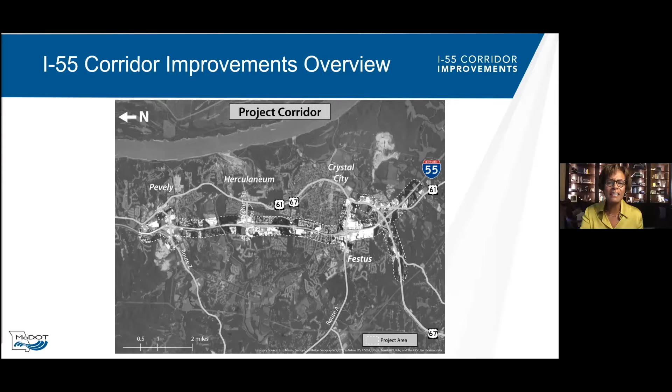No worries. Just to kind of kick off, give you a brief overview of what this project entails. We are studying I-55 from just north of the Pevely interchange there on the left side of the screen where the current 3-lane section ends. And we're covering about 8 miles of I-55 past the Herculaneum McNutt exit, the Festus Route A exit, and the Route 67 exit, to about a mile south just before the bridge over the railroad tracks. We're also studying US 67 from where 61 splits off down to the Route CC intersection.

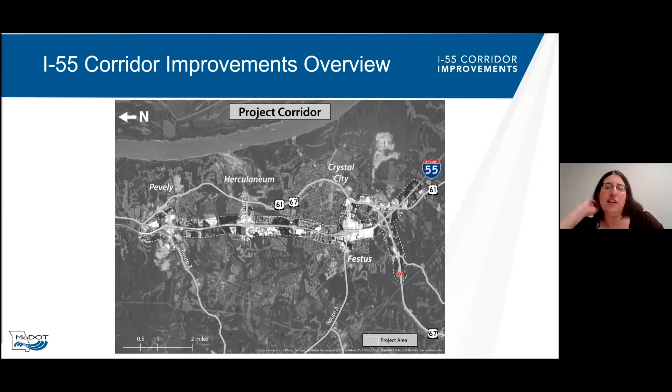MoDOT has committed funding for this project in fiscal year 2024. However, we are just now beginning the process of identifying those improvements. So there's nothing defined right now. What this corridor study allows us to do is it allows us to determine the needs in the corridor. We are currently in the first phase documenting the existing conditions.

During the summer, we have taken a look at the engineering factors, and we're reaching out during this public meeting phase to get public input into, are the things that we're seeing on the engineering side really your lived experiences of the corridor? We'll move into a second phase through the fall here, where we look at various alternatives to address the problems that we identify in the corridor.

As we wrap up the analysis of those alternatives, we will engage in another public meeting this winter that will allow you to provide input onto which part of the alternative you would prefer. Again, as I mentioned, we have a budget set for funding in 24, but we're not trying to design a project to a specific budget.

We're really going to look at what the needs of the corridor are, and if needed, determine how to fund future improvements, whether by adding more money to the funding in 24 or phasing the project over multiple years. We'll continue to do this throughout the spring and summer of next year by continuing our engineering analysis and public engagement.

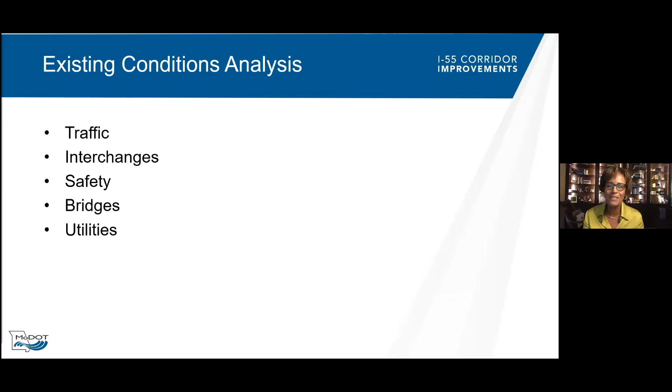Now, Lorna, I guess it'll go straight to Will. Yes, thank you. Sorry about that, Jen, and Will, take it away. All right, thank you, Jen and Lorna.

Just to kind of zoom out a little bit and talk about the corridor in the context of where it fits in the region, and then even nationally, if you think about Interstate 55, it essentially connects Chicago to New Orleans. So there are definitely people that use this corridor that are not starting in the region or ending in the region, much less your specific neighborhood.

Additionally, Mississippi River, barge traffic, et cetera, there is a lot of freight that comes up and down this corridor as well, whether it's generated from within the corridor or just traveling through. So just a little context in that sense. People transporting goods, people are commuting, people are using the corridor for recreation, and then simple local access to get to shopping or to visit friends as well.

As you likely know, the project is roughly 30 miles from downtown St. Louis. It does start, as Jen indicated, in Pevely, goes through Herculaneum, also includes Festus and Crystal City. It's more than 7 miles. It's close to 8 miles of interstate. Includes the 4 interchanges, and it also includes, as Jen said, 67 over to Route CC.

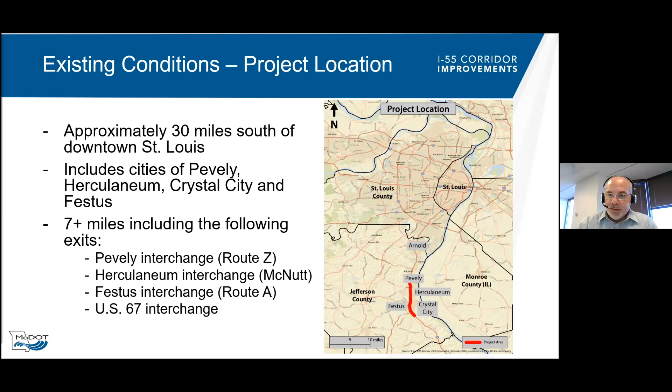So we took a closer look then at some of the existing conditions in the corridor. So this is a map zoomed, it's rotated. So north is to the left now instead of up, south is to the right. And we'll walk through some of the existing conditions we've identified from north to south. So starting at Pevely, this is essentially where the 3-lane section ends at the ramps to the Pevely interchange.

So if you're familiar with that, as they end, the southbound lane on the highway just takes you right down that ramp. So if you ever notice, some people perhaps not familiar enough with the corridor might get caught in that lane and feel the need to jump over to continue south.

There's a couple of railroads at this interchange, the BNSF Railroad to the north and then UP Railroad to the south. Those two do constrain the corridor some, in that they cross close to where the ramps connect to the highway. And if you look at the horizontal curves before and after the BNSF crossing to the north, it does influence the geometry of the highway as it crosses the railroads. So those are just some considerations there.

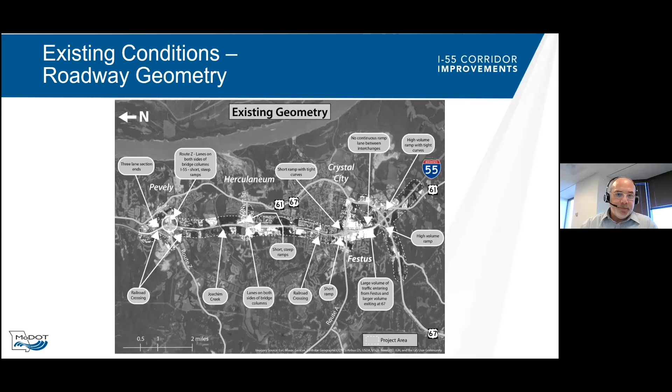Thanks, Will. Yeah, I'm going to talk about traffic, and a lot of our traffic conditions are directly impacted by these geometric issues that Will just described, and we'll touch upon those a little bit as we go through the corridor again from north to south. We've color-coded I-55 to represent the congestion during the peaks on I-55. So where you see green is where the data indicates that there's minimal congestion. Yellow would be mild congestion, and red would be heavy congestion.

So as we step from the north to the south, as Will mentioned, north of the Pevely exit, we have 3 lanes that then drops to 2, and that's where we see our traffic go from green to red. So in this area, we have about 71,000 cars per day that use this section of I-55. South of Pevely exit, we have about 66,000. So just a few thousand less, but the capacity is reduced by 33% as we go from 3 lanes to 2 lanes.

So as you see here, this would be in the afternoon, our traffic conditions show a lot of heavy congestion. And this is really looking at how much volume we have to how much capacity we have. And we're really kind of at that tipping point where things can break down real easy. And we know we have a lot of incidents along this stretch of I-55 and throughout the corridor.

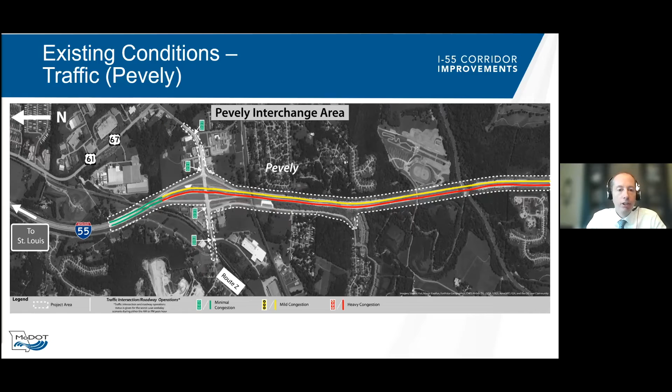So the yellow you see, that would be for the morning peak on northbound I-55. So the morning is a little bit less than the afternoon, but it does definitely open up as you get north into where 3 lanes opens up, turns green again. So as we move south to the Herculaneum exit, here we have about 60,000 vehicles that use this section of I-55 every day. So a little bit less than what we saw up at Pevely.

And as we step down the corridor, we start to lose that traffic at these interchanges. There's a lot of different land use that is pulling that traffic off between restaurants and the truck stops and different retail, but also just a lot of residential in the area. Here at the Herculaneum exit, we do see a lot of congestion at the Herculaneum Crossing intersection.

This is where both of those truck stops come out. So you get a lot of trucks stacked up on either side trying to get back to 55. And we're indicating that with the yellow here, but really those side streets are, I would consider, heavy congestion. Again, we have about 16% of those large trucks on 55, but a higher amount at the interchange itself.

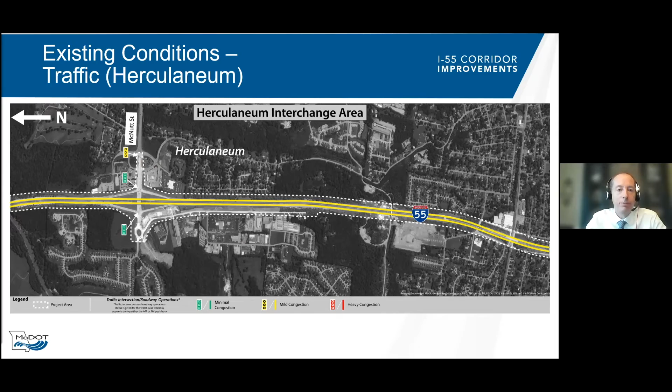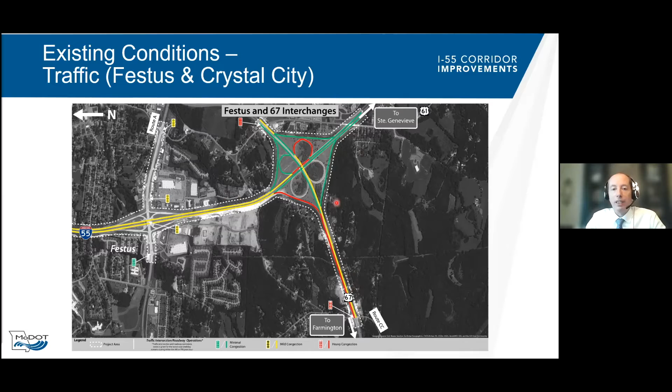So as Will mentioned in the morning, we see that northbound 67 to northbound 55, this very tight loop ramp with a hill that you have to climb. That ramp, much like this ramp, is also getting to be over capacity, and we see a lot of congestion issues on that. Some of these issues also lead into some of the safety issues that we see. And I'm going to address those next.

So we'll step back to the north end of the study area again, looking at some of the safety. We've been analyzing all of the crashes for the last 5 years, so 2016 to 2020. Just a little note on crash data. All the police agencies send in their crash data, and it takes a while to compile all that. So we have to go back a little further, since the database won't have any crash data for the last few months. So that's why we only went through 2020.

But here on the map, what we've mapped is the number of fatal crashes, which are obviously very concerning to us. Also the suspected serious injury, also considered disabling injury, and then also minor injury. In total, there's about 2,000 total crashes in that 5-year period that we've looked at. There's also within that a lot of property damage only, so just damage to the vehicles themselves, not injuries. We left those off the map just because it would overtake everything else, and we really like to focus on where these serious injuries are.

So one to note here at the Pevely interchange is a fatal crash at the interchange. This was an out of control crash.

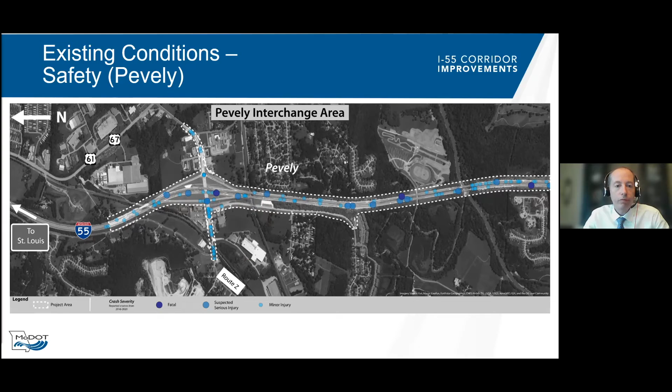Same thing happens at Herculaneum at the interchange there. Groupings of these kind of crashes around the merge points and weaving areas. We also have a few fatalities that we've recorded and found in the data. Obviously, again, very concerning with those.

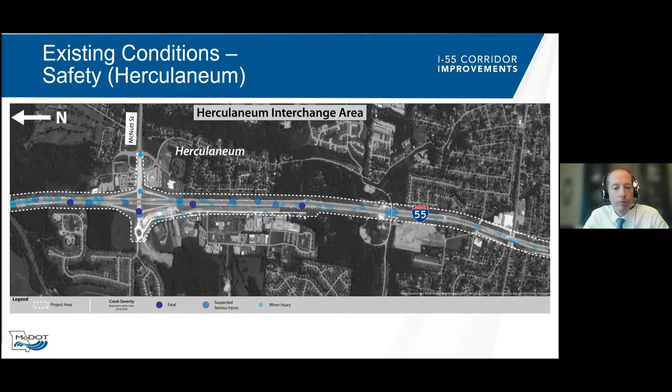Same thing again here at the Festus interchange. As we've mentioned, these ramps are very short, very little time to decelerate or accelerate as you get off or on the ramps onto the interstate. So you see these groupings. We did have a fatality here in the northbound lanes in 2017. That was a rear end crash that resulted in a fatality.

So 3 more fatalities on the 55 southbound to South 67 ramp. The thing to note on these 3 is those were all in either 2016 or 2017. Since then, MoDOT has constructed the project with the auxiliary lane, but also did a lot of improvements to the ramp itself and improved the sight distance by removing some of the rock bluff that was over here. And we're seeing in the data some improved conditions on safety because of that project that has already been done.

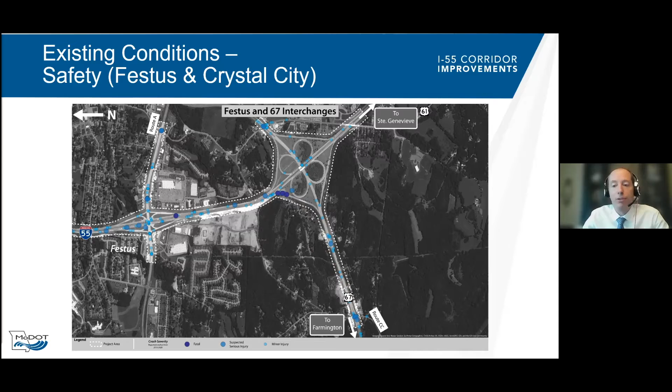So with this project, we'll be looking to continue that and identify and focus on other areas with these serious injuries. One more to note is also seeing the same type of issues on 67 itself. And it's the same areas where we see the geometric issues with the hills and also the traffic issues. So a lot of these are all very intertwined together. Next, I'm going to turn it over to Jennifer Pangborn to talk about some of the stakeholder input that relates a lot to the 3 areas that we just mentioned.

Perfect. Thanks, Mike. So in addition and in summary to the analysis that Will just talked to regarding the geometry and Mike talked about with traffic and safety, we conducted meetings and interviewed stakeholders along the corridor to get a better understanding of the issues and their perceptions of how things were operating. And here's what we heard from them along the study area.

At Pevely, the biggest corridor deficiencies included the evening rush hour bottleneck that starts at Pevely, where the lanes are reduced from 3 to 2 lanes southbound, that was already discussed. This is where it gets really congested, and that's where the operations greatly decrease. It was identified that the ramps were too short overall on all of the on and off ramps here at Pevely. And people felt it's really dangerous when trucks don't have enough time to move over or merge into mainline traffic. It was identified that there were frequently crashes at this location where the lanes drop, and at the spot where the vehicles are entering the interstate specifically, there's definitely a need to get vehicles up to speed.

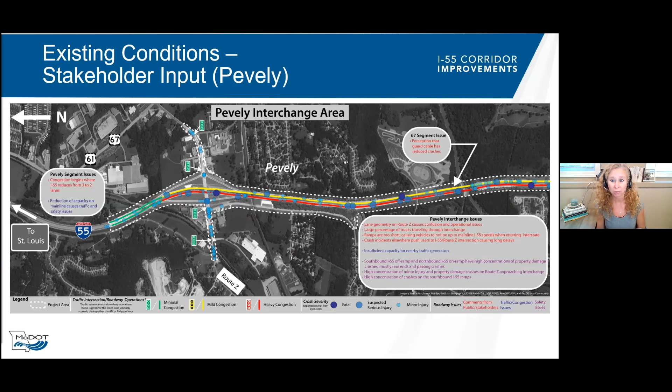What we heard at Herculaneum, we heard here as well that the ramps are too short and it leads to difficulty merging on and off the interstate, so similar to Pevely. Traffic backs up from these off ramps onto the interstate during the peak hours. Again, really creating some safety concerns and leads to incidents at these locations. Some other areas that were identified that are challenging: the lane geometry at the Herculaneum interchange is where people said that they get stuck in the wrong lane frequently, and some people even felt that there was unclear signage at this location to note.

Emergency responders specifically said that they felt that there were narrow shoulders along mainline in this location, really making it difficult for them to respond to incidents, to pull over on the side and even change somebody's tire that was on the shoulder. So a lot of concern for safety for emergency responders. And then it was noted that all ramps and mainline I-55 at this location have high crash concentrations and some concerns for safety.

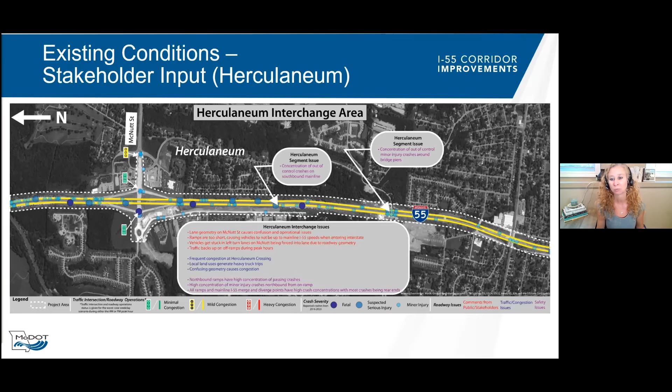And then lastly, at the Festus and 67 interchanges, and I'm gonna group these together real quickly. We heard that these two interchanges are really busy. The close spacing led to some moderate traffic congestion, and breakdowns with incidents happened really quickly.

It was identified that a lot of traffic is weaving between these two interchanges, between the on and off ramps. And at the Festus interchange specifically, some of the issues identified were that the Festus exit doesn't have a long approach and it's treacherous getting off at such high speeds. The truck traffic here was identified as exacerbating the conditions. It was identified and shared that there are no pedestrian accommodations or sidewalks for people to be walking on, and that there was a desire for people to walk east-west at this location.

And it should be noted that there are a lot of destinations, a lot of places that people are trying to go even east-west, and that there's a lot of concentrations of crashes, even on Route A here, that people really felt there's a lot of congestion and safety issues.

And some issues were identified at 67, that this is a really big interchange, that there's operational issues with the merges and the diverges, the on and off ramps, and specifically between the different loop ramps, both on mainline I-55 and on 67. There was a lot of discussion about the northbound 67 to northbound 55 loop ramp that Mike discussed earlier, and how it operates poorly during all periods of the day. And there was, again, lots of discussion about the speed differentials on some of these on and off ramps.

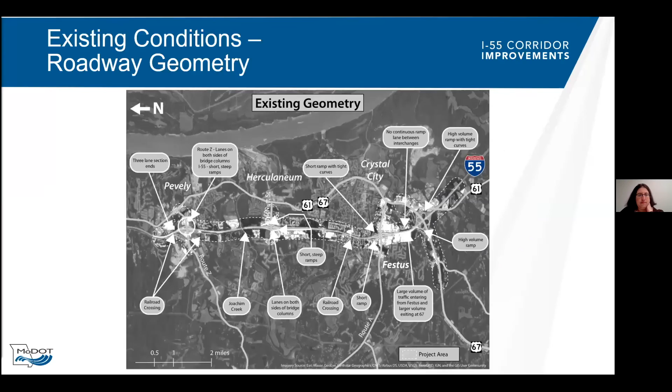Any other comments or questions? I see one comment, very informative. Thank you for opening this to the public. Of course we would, yes. We would and we should. Thank you for being interested. Any others? I'm scrolling to see if there are any others, and I am looking.